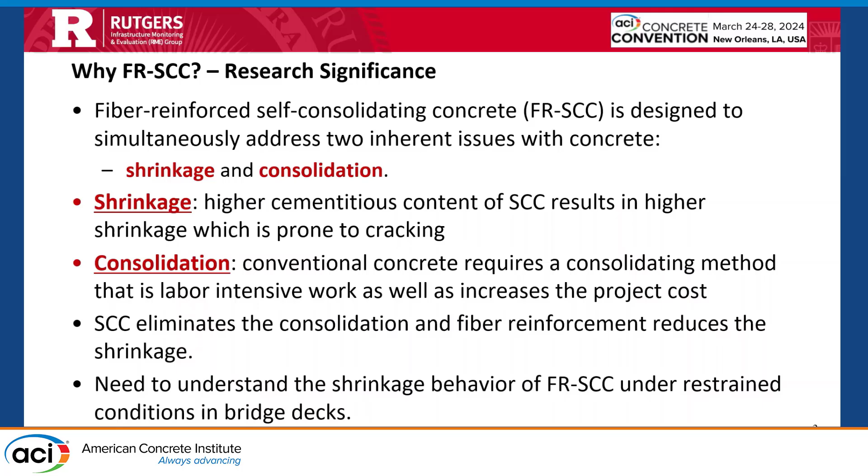So we looked at the mix design. We used mainly polypropylene fibers because the agency was not really too excited about steel. They always say, oh, we get pitting corrosion in the steel in the negative moment region. We don't want the bridge deck to look brownish all the time.

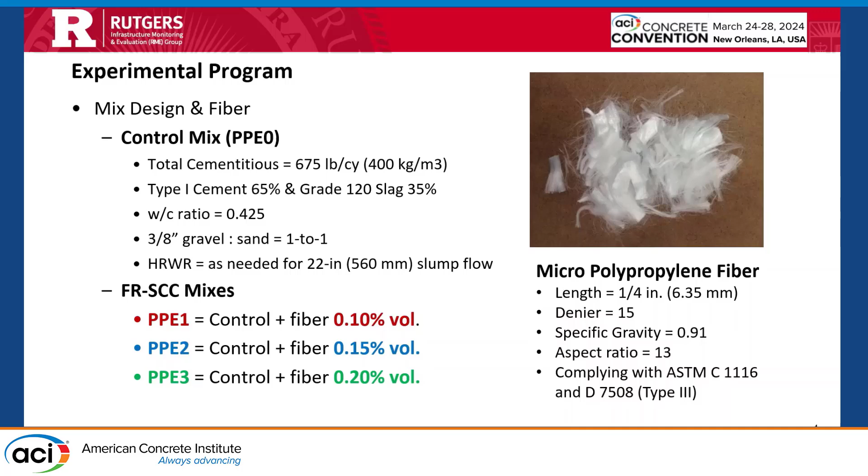But we ended up doing the polypropylene fiber. We tried 3 different mixes with different volume fractions. We mixed it in the lab, and I tried to look at a modified setup for the ring test. So instead of just putting the foil strain gauges on the steel, we tried to also measure what we call the hoop stresses, or the strain in the concrete ring.

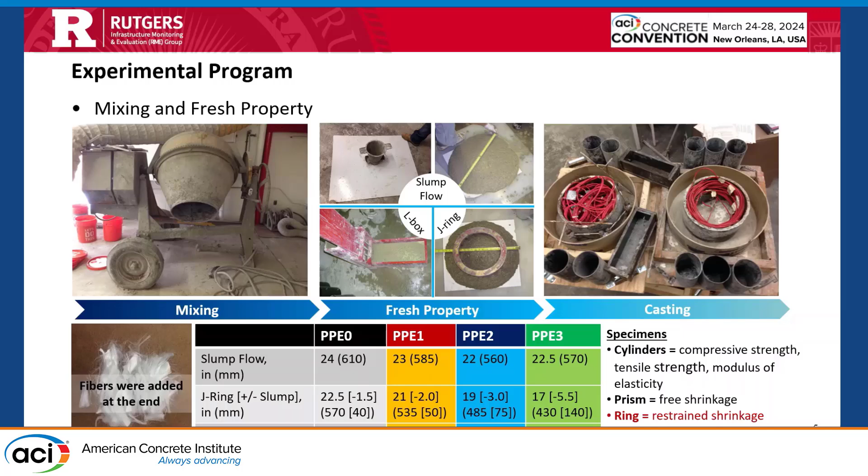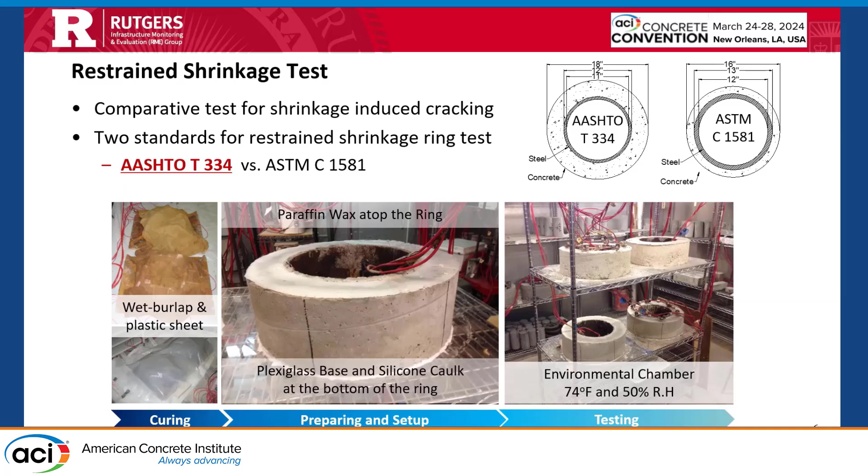To be able to do that, here, okay, you probably could see it here. I think I have another picture, but this is the restrained ring. We had the waxing of the top, so the shrinkage is only in one direction. And then, with the help of the student, we made a template to make vibrating wire strain gauges almost like a closed loop. So this way, no matter how the concrete shrinks, these vibrating wires would always give you the strain, and this is the picture here. So this is the template.

So when we cast the ring, we are able to put this template. These are vibrating wires, 6 of them. They're connected together. They can move this way. And Geokon helped us, and now I think they sell this gauge with the legs welded to the gauge. So in other words, the gauge length is slightly modified, and then all we do is insert it.

We put this template in while the fresh concrete is being placed, and then we have very thin bolts coming out. They don't interfere in the shrinkage behavior. Sometimes they do if they are too deep, so we try to keep them with the template at a certain height. Then when the concrete is shrinking, the ring is shrinking, and these vibrating wires, some will be in tension, some in compression. You end up measuring over time the strain in the concrete at different locations.

And we also look at the strain gauges on the inner side of the steel ring. I'll show you a curve. From the vibrating wire, you can see the strain, and we test cylinders at 1, 3, 7, and 14 days, so we are monitoring the cracking capacity of that concrete. We have that line, and we know from the vibrating wire the strain in the concrete, and the minute the capacity line hits that line, you expect a crack at this age. Usually the students are very good at saying in 2 or 3 days we're going to get a crack at this location.

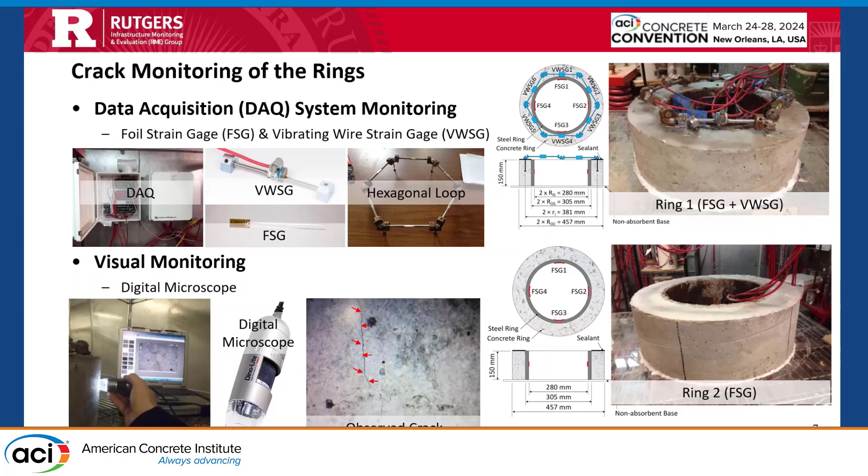And then they go with this small digital microscope and scan the ring for cracking, and they are able to measure the crack width and the crack length. That's how we measure the cracking density and so forth. So this was a kind of modification of the AASHTO T334, I think, and it was provisional when we started. Now it's permanent. Jason, I think, was able to get the ASTM standard, but that ring is a little bit smaller than this one, so we still use AASHTO because that's what fits the bridge decks.

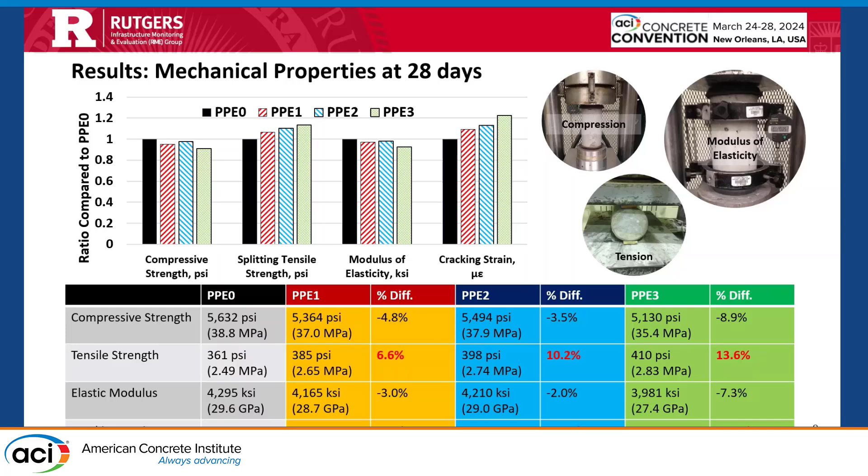So if we look at the different mixes, here is the ratio of the compressive strength. We did all the testing, and you can see that the fibers have a slight influence on the properties. However, the more fibers you use, there's an enhancement in the cracking strain. And this is the change in length. We measure from the specimen, ASTM C157, to see the free shrinkage properties. Why? Because you cannot spec the ring test for field measurement. That's impossible, we realized that. So we tried to put a limit on the free shrinkage that correlates very well with the ring test.

So in other words, whenever the ring test was showing that it will crack, we monitored also the free shrinkage strain, and then that would be the limit that we have to specify. We ended up in the specification with around 400 microstrain. So this test is useful, but for cracking, it doesn't give you the indication for the potential of cracking. So we had to apply the limit that we correlated with the other one.

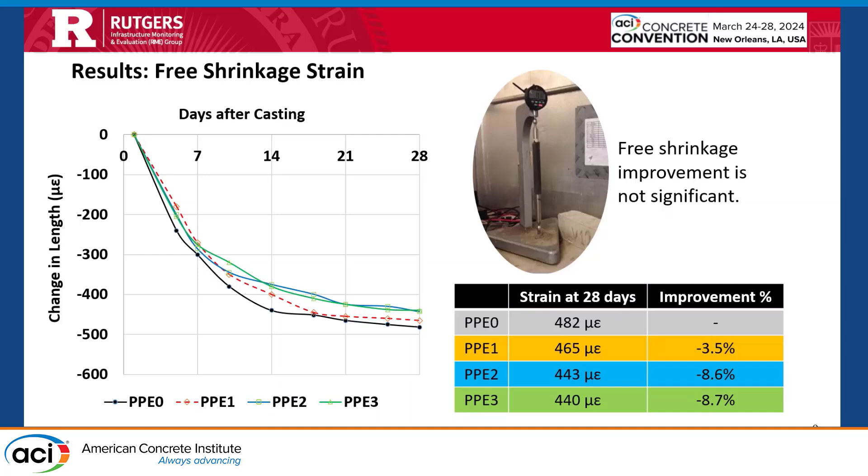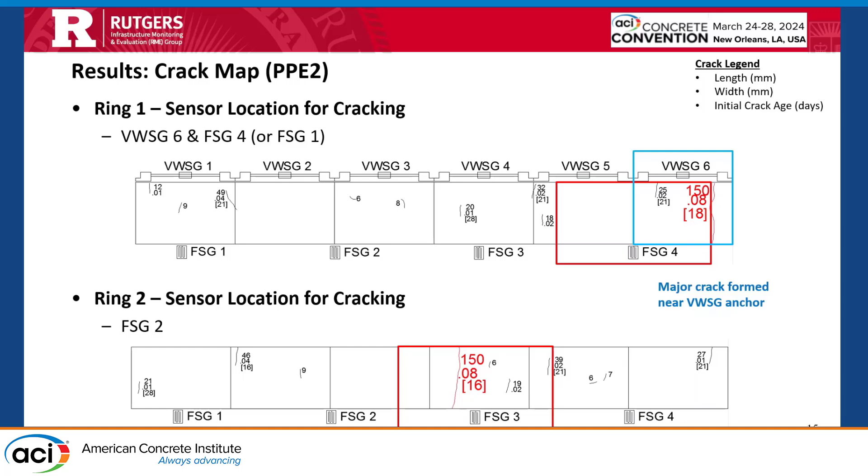And so I'm going to go through this quickly. Same behavior on most of them. So actually, the shrinkage is not uniform. We assume the shrinkage is uniform and radial. It's not. Most of the time, it depends on where the drying is happening, in one location more than the other. But if this is symmetric, more or less it would be. So these are all the mixes. I'm going to go through them quickly.

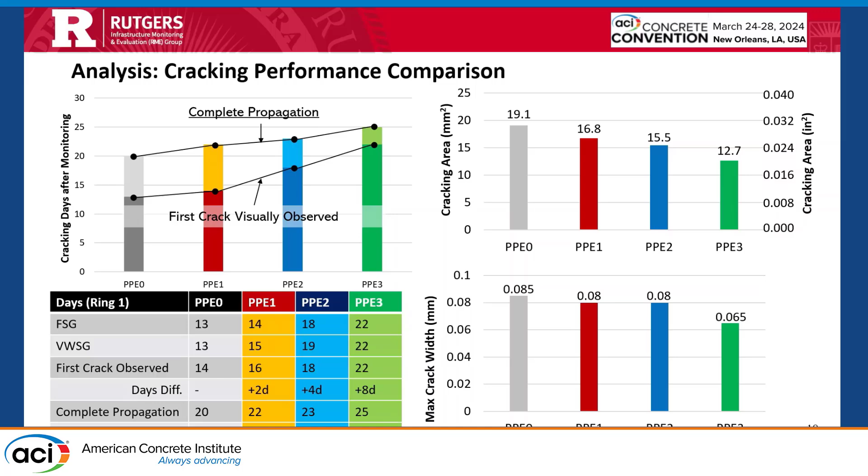So you could see here, this is the cracking days. The number of days increases, and the potential for cracking decreases when you increase the fiber percentages, as expected. And we have also the number of days from the foil strain gauges and from the vibrating wire, and they kind of coincide also.

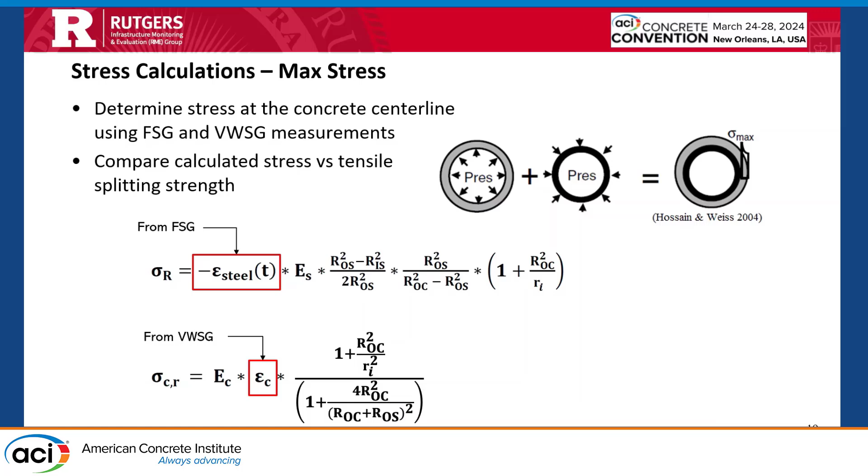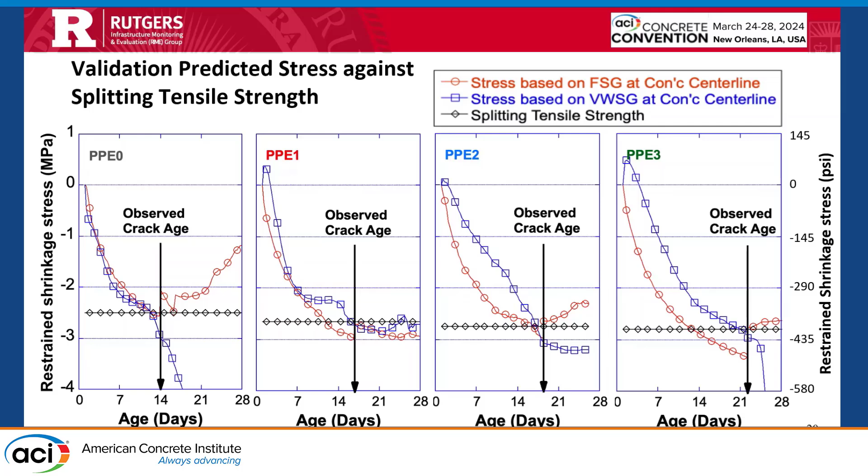We looked at what Dr. Weiss did with his student. Basically, from compatibility of the strain, they were able to derive this equation. So we said, let's see how that works for the fibers we have. And we found out that it's really very good, but when you add the fibers, the equation misses it a little bit, not with much difference. And so we corrected that equation and added a correction factor that will allow you, if you have fibers, to predict when it would crack and what would be the cracking strain.

So now we did probably 11 bridge decks with fibers. Turnpike has a standard mix. We made it not SCC but FR-HPC, so the HPC mix, but with only 5 to 7 pounds of fiber added. We made it very, very simple. It can be pumped, it can be poured from a chute, and we have a specification that's working. We are doing a demo now with the New Jersey DOT to start using that as their standard mix.

And we did the crack mapping for 3 years before the bridge opened to traffic. After the bridge was open to traffic, they allowed us to go there and do the same crack mapping, and we saw about 33% reduction in the number of cracks and in the crack density, especially in the negative moment region.

So I think the vibrating wire is a little bit of work, but it's really very informative to get the strain in the concrete. So you're not really relying on the equation, which might not give you all the boundary conditions. But still, as a reference, that equation does a really good prediction. I recommend using it to predict the strain.